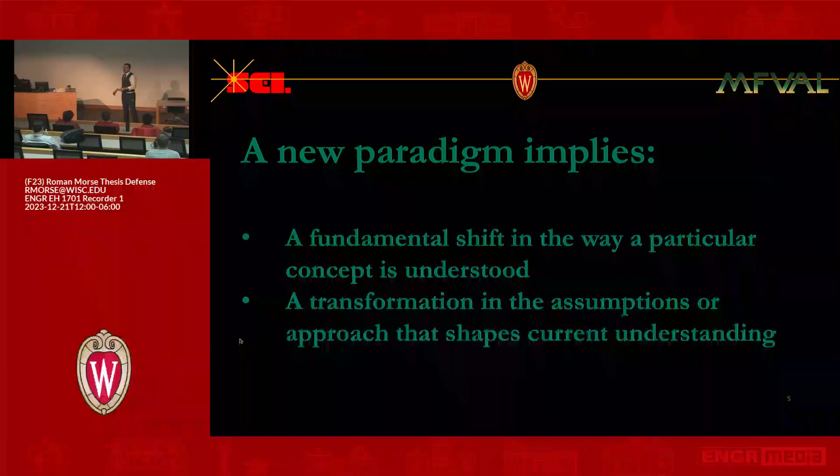So what is a new paradigm? Well, a new paradigm implies a shift in how we think about something conceptually. New information is brought to light, and it changes basically how we view some sort of concept or how we approach something. So, bold claim. Well, you should be asking, what's a current paradigm? What's wrong with it? And what information do I have to show that there is a new paradigm, that we should change a paradigm? So that's what we're going to talk about today.

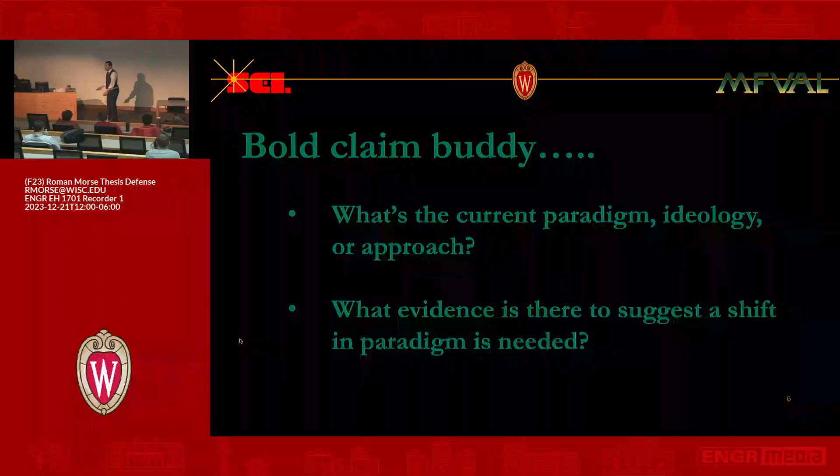All right, so the introduction is just a little bit of description of our work, and then some basic nomenclature, some definitions, and then we'll get into the fun stuff.

But you do reach a certain point where there's this boiling crisis, as it's called. This is associated with a severe reduction in heat transfer coefficient. This is very bad for something you want to keep cool.

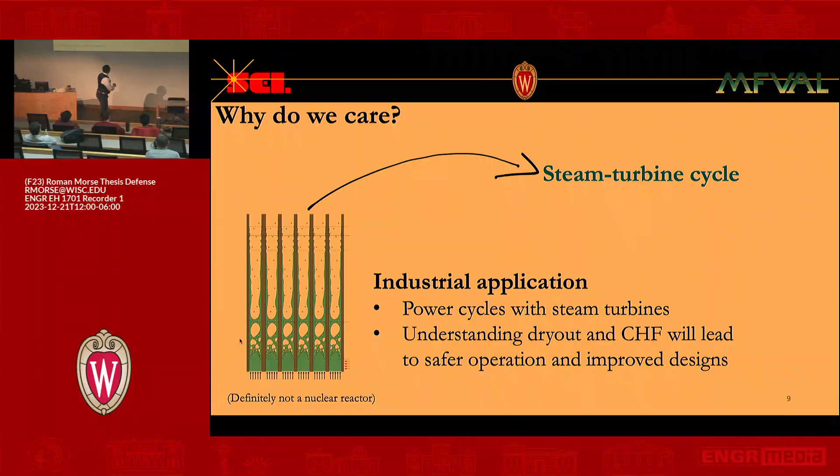And what this looks like — well actually, why do we care? Well, if I take that and I turn it around, flip it on its side, stack a couple of them together, basically this is what a boiler looks like. This is a nuclear reactor, essentially. You have water coming in, steam coming out, goes to a steam turbine cycle.

It's actually a transition of regimes. There's a lot of cool stuff in that poof. So we're going to talk about that poof all day today.

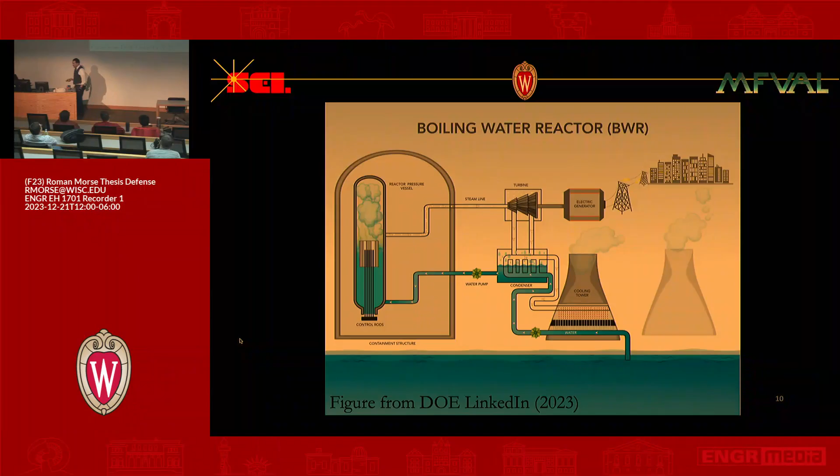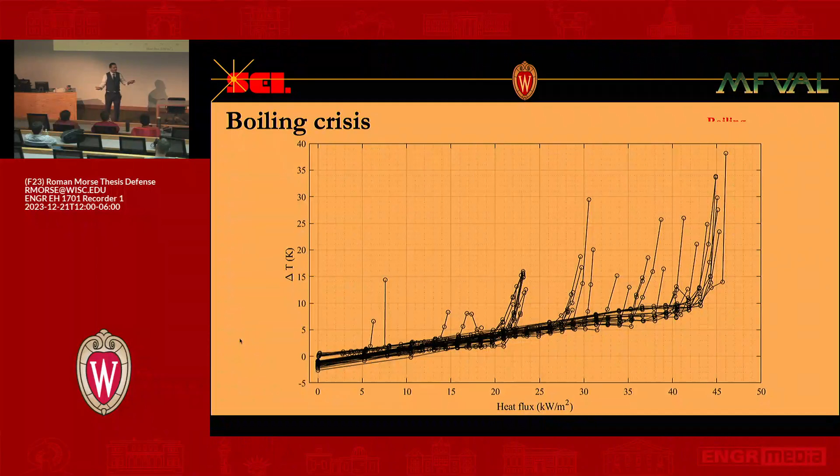We're going to call them... so the nomenclature is also inconsistent in the literature. I'm going to use critical boiling transition and CHF as equivalent names because everybody seems to. But at some point, us nerds should get together and figure out what to call these things.

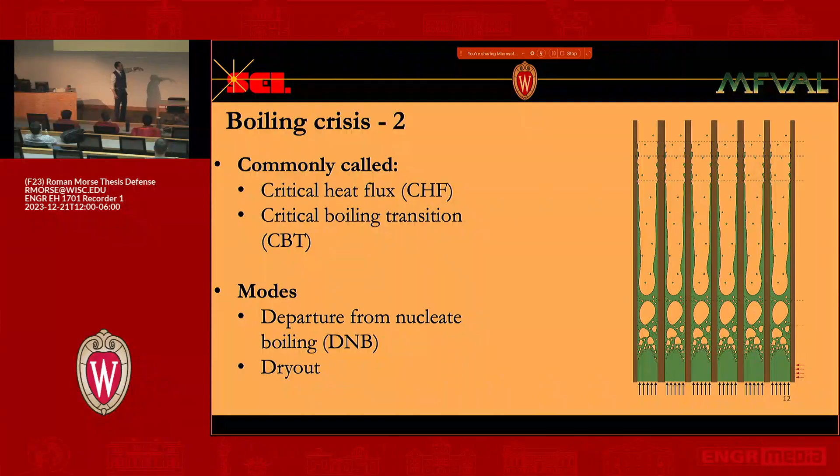All right, so you guys missed the most important stuff, so might as well check out now. But basically, there's two types of boiling crisis, or critical heat flux, or critical boiling transition. There's two ways that this can really happen. One is at the top of the reactor or the boiler, and one is at the bottom. So the one we're concerned with is this dryout, and that happens up here at the top. There's also what's called departure from nucleate boiling, and that happens at the bottom of the reactor. So dryout happens where you have evaporative film boiling, and departure from nucleate boiling, or DNB, happens when you have nucleate boiling as the dominant mode of phase change. But again, we're going to focus today on dryout.

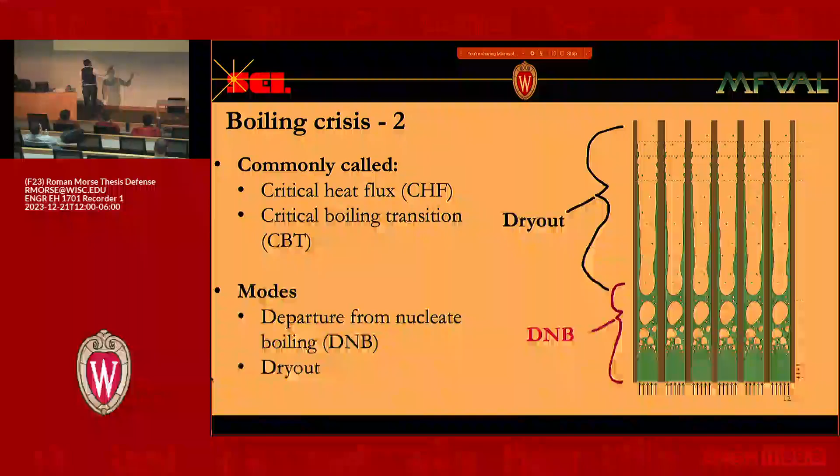And the reason this is important is because most of these flow channels are actually annular flow. This is from Jean-Marie Lacour, he was a Westinghouse engineer, and he runs these simulations with this wicked cool proprietary software for boiling water reactors. This is a simulation for a boiling water reactor that he ran for this year's NURETH paper. As you can see, if the entire flow channel length is 3.5 meters, annular flow starts at 0.6 meters. That means like 85% of the channel is in annular flow. So that's why dryout, and understanding dryout, what causes dryout, basically how to control it if you can, that's why this is very important.

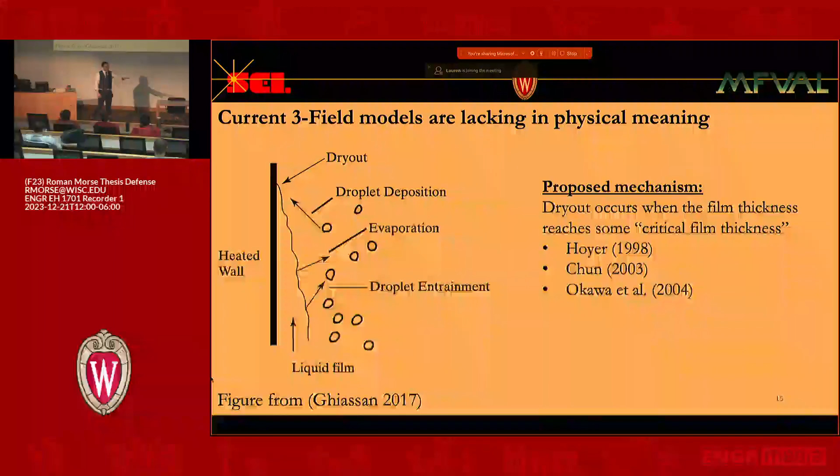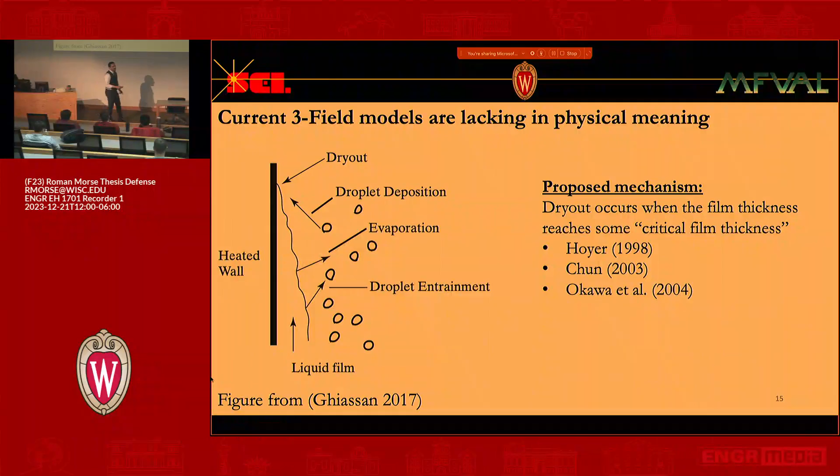All right, so what is the current paradigm? Well, the current paradigm and the current proposed mechanism is a critical film thickness. Basically, the film gets to a certain height, and it just poofs. This is analogous to my poof earlier. So in the way this is modeled currently, it's a three-field model. Basically, I have the film here just smoothly transitioning to zero. And then there's these critical film thickness correlations, and these are needed in order to make calculations for reactor codes.

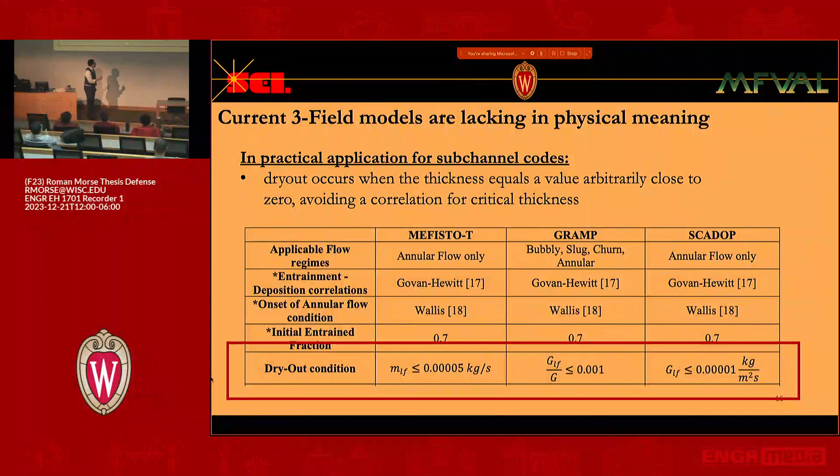There's another way to do it, which is maybe just as arbitrary. Basically, so these here, MEFISTO-T, GRAMP, and SCADOP, are reactor codes, basically thermohydraulic codes. MEFISTO-T is the Westinghouse proprietary one. I think GRAMP was built by Imperial College, and SCADOP is an Indian company, maybe. But this is the criteria they have set for dryout, just that the mass flow rate is some arbitrarily low value. This doesn't tell you anything about physics. This doesn't actually help your prediction. You're just saying, okay, it's so small that I probably don't have film there. Hopefully that works, but you're not really telling me anything about what's going on here. So this does work, and you can iterate through this and make sure you reach an appropriate level. But because we don't know the mechanism and we don't know why this is actually happening, we always have to kind of stay back from our optimal operating conditions.

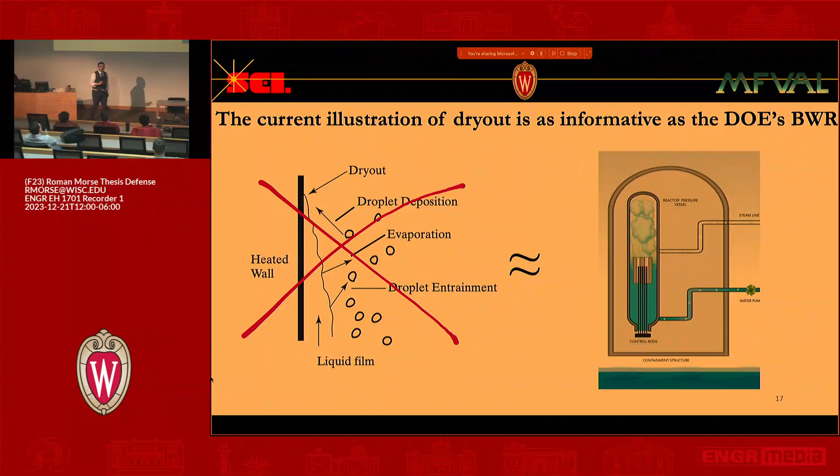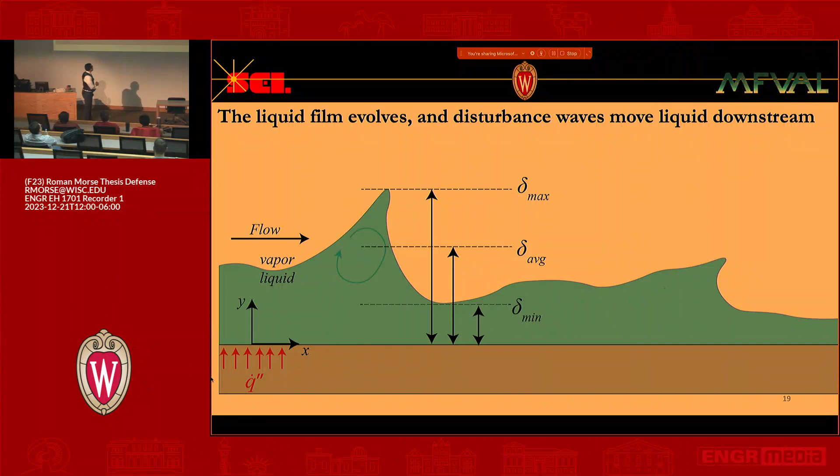We can never really push it because we don't want to have a nuclear accident. All right, so I want you to think of this poof and this poof as being analogous. And we're not going to think about it this way anymore. We're going to talk about the film as a different construct rather than just a continuous liquid film. So really what happens is you have a film that's comprised of basically a base layer and a wave layer. And as you propagate downstream, you end up with this intermittent dryout. It doesn't just go poof. You have wet, dry cycles. And so understanding how those work, understanding how long it can be dry, how long you need to be wet before heat transfer is completely degraded, is really important. So that's what we're going to talk about.

So first we're going to go through a timeline of our work. Then I'll talk through the facility, and we'll look at some measurements. All right, so the MFVAL timeline.

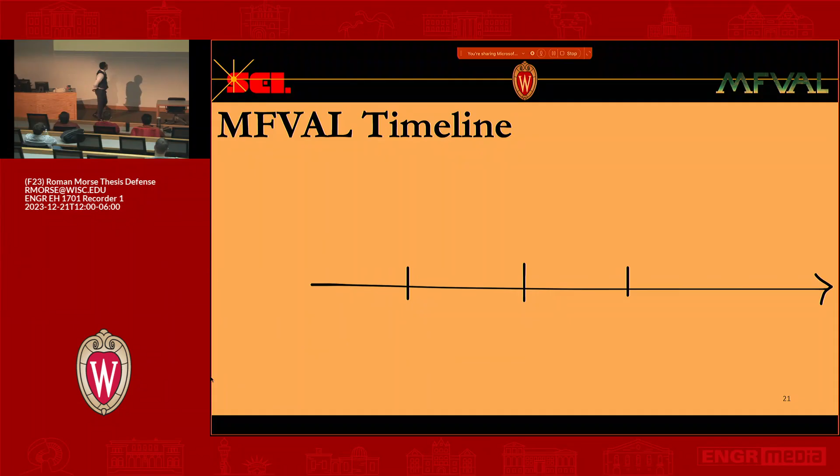So when I arrived in 2017, we had just taken over for a professor that had left. That professor, Tim Shedd, was an established professor in the two-phase field. He had already published significant papers about droplet entrainment, velocity distributions in the liquid film, and had made the lab an established place that performs good science. But when we got there, it was bare bones.

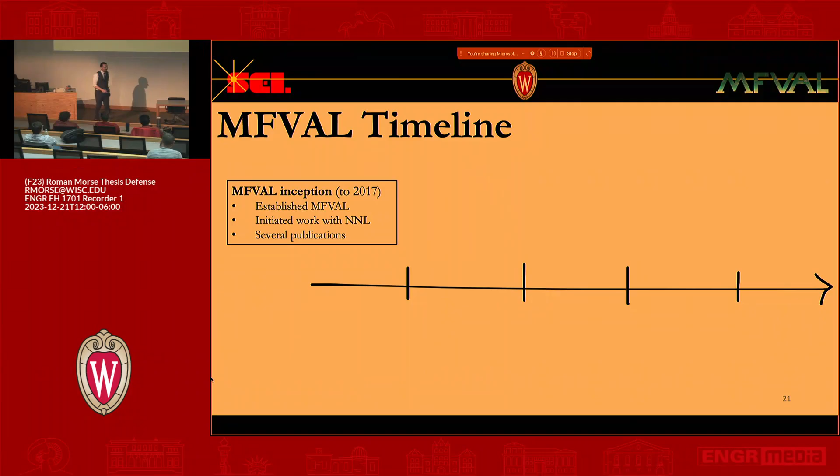So we get there, and the way I get my foot in the door is Dressler, as we're leaving MATC one day, we're sitting at a table, and he's like, man, I need a plumber in my lab. I was like, my dad plumbs, my dad's a plumber. Having no real plumbing experience myself, but I was like, dude, yeah, totally, my dad's a plumber, I could do it. And so he's like, all right, fine.

So he brings me in, and then we get another graduate student, Brian Fehring. He comes in, and basically he took a lot of time to make sure that the structure was good. He also implemented these optical techniques and made sure that they were measuring what we needed to measure. He spent a lot of time in CAD, thankfully, because I hate CAD, but did a lot of stuff to improve the integrity of the facility.

Then we had a visiting scientist, Tiago, come from Brazil, and he was just described to me as some kid from Brazil coming out. And so he gets there, and it turns out he's like a wizard, and he knows two-phase flow. This was the biggest thing.

At this point, we were still just a bunch of guys that kind of knew what we were doing. We didn't know if we were measuring stuff right, or if we were running the right sort of conditions. What Tiago really brought to the team was validation. He had been through this before, had worked in a lab that had done these experiments, had published good work, and knew how to perform these experiments. This was a really big step.

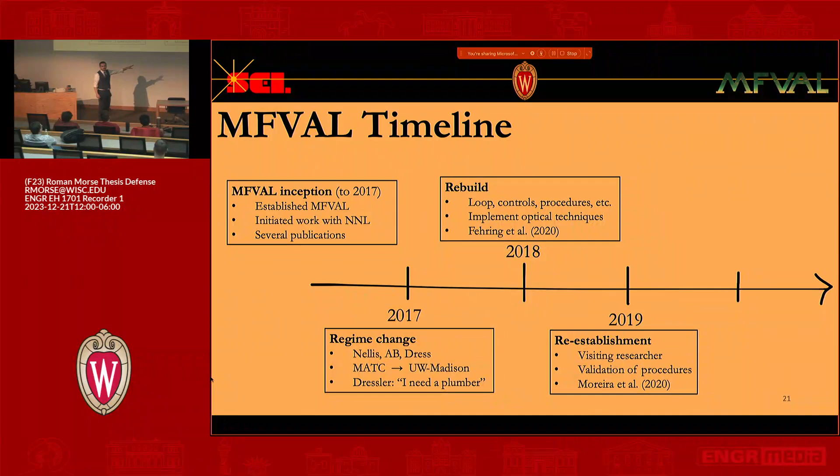This is us stepping into the big leagues. This ended with Tiago publishing a paper that measured wave velocity in annular flow. After that, we kind of took off. We had a big paper in 2021, and then I've had a couple papers since then. Jason's also got one in the works, so we've got 3 or 4 publications coming out. It'll all be 2024 - it says 2023, but these will all be 2024, except for the Nerith one.

But basically, yeah, now the lab is established. We're doing good science, we're known for doing good science. And so let's talk about science.

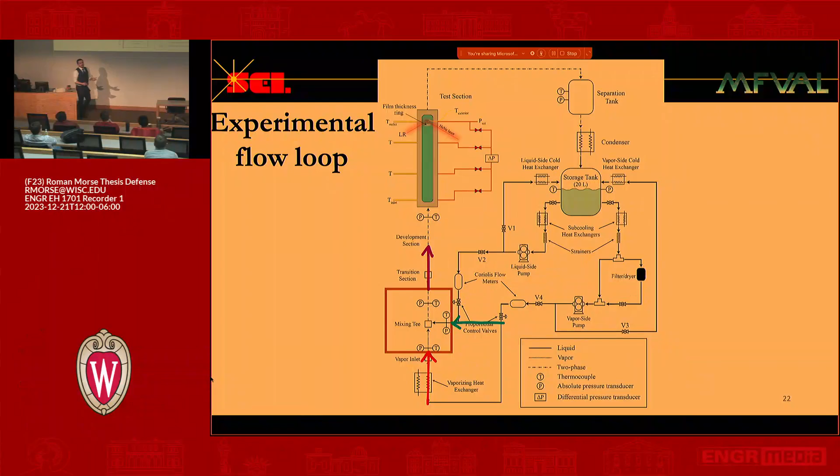So this is a schematic of our flow facility. We're going to start from this storage tank here. There are 2 separate circuits: one has liquid that gets injected into the loop as liquid, and the other has liquid that eventually gets vaporized and injected into the loop as vapor. They mix, and we get a known vapor quality. Starting at this mixing tee, I mix superheated vapor with subcooled liquid and get an outlet mixture with known vapor quality. This then enters the test section here.

Our test section itself is 2 big glass slab walls. This was designed by Chris Rushmore, this guy right here - phenomenal job, still in use today. 2 big glass slabs, and on the inside of the glass slab there's a tin oxide coating. We apply a current through that, and that allows us to heat.

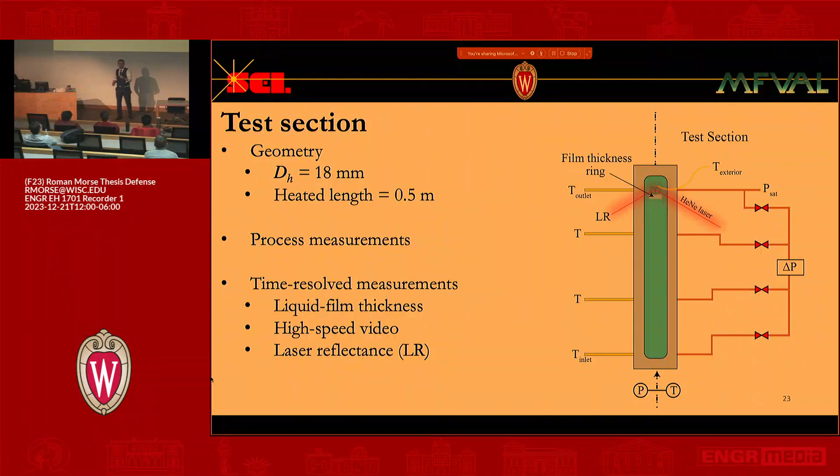Along the test section itself, it's fitted with pressure measurements, differential pressure measurements, and temperature measurements - these are all process condition measurements. We also have non-invasive measurement techniques that we use. This helium neon laser and this film thickness ring are used to measure things external to the test section, so we're not probing the film or disrupting the flow, we're measuring it from outside the test section.

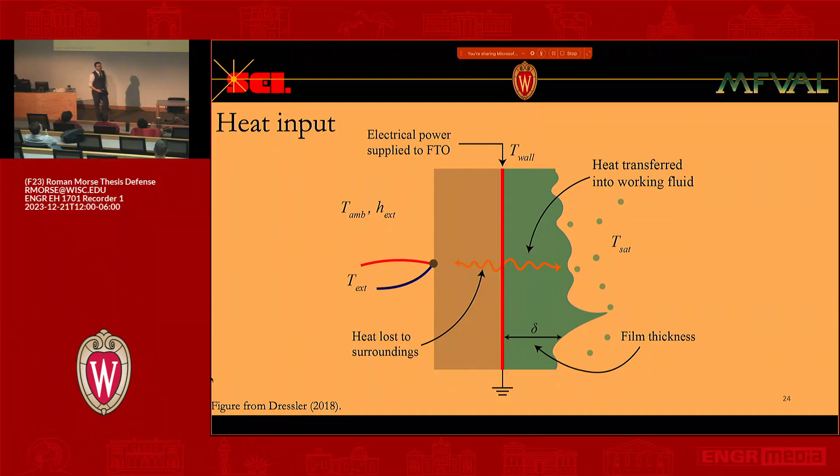So how does heat get input in the system? We talked about this a little bit. Basically, there's a tin oxide coating, and we apply a current to it. Some of the heat goes into the working fluid, some of the heat escapes to the surroundings. We account for this using a thermal resistance network and an energy balance. We can go through that more later if you guys are interested.

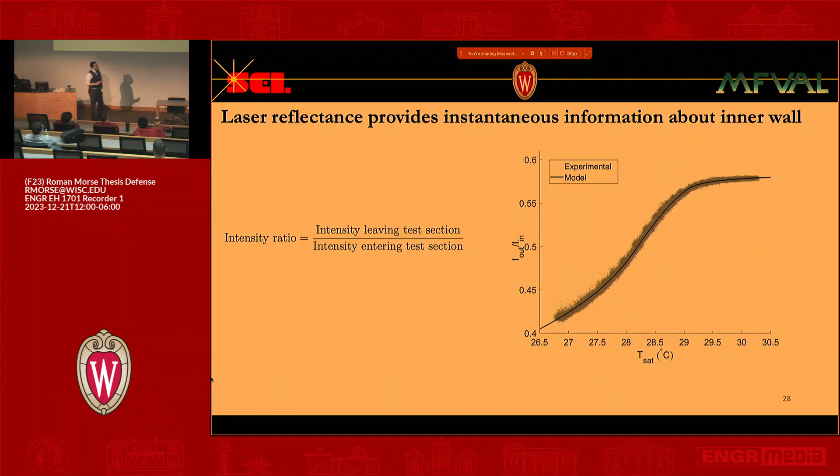That's awesome, we can measure the inner wall temperature without having to stick a probe in there. Super cool. Well, I'm kind of a simple guy, so I figured we could also use this as just like a binary signal. Basically, if I have liquid at the wall or I have vapor at the wall, that signal changes dramatically.

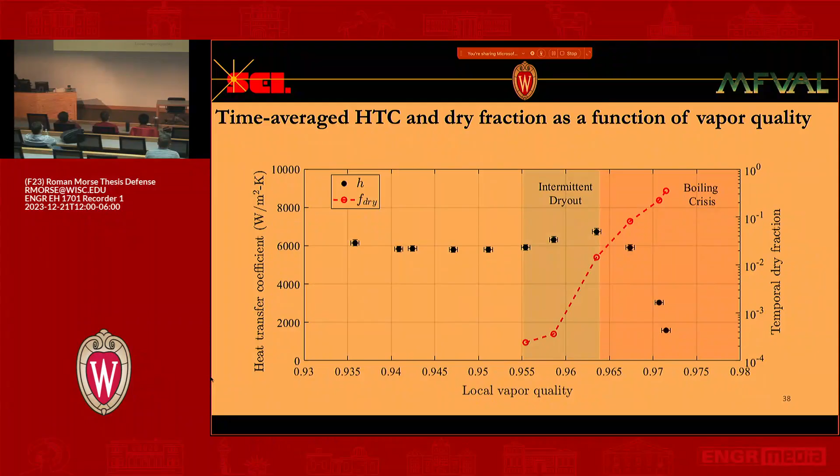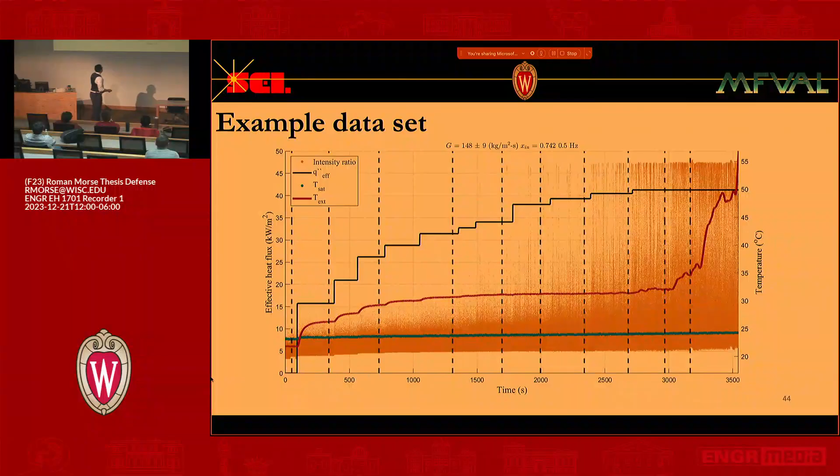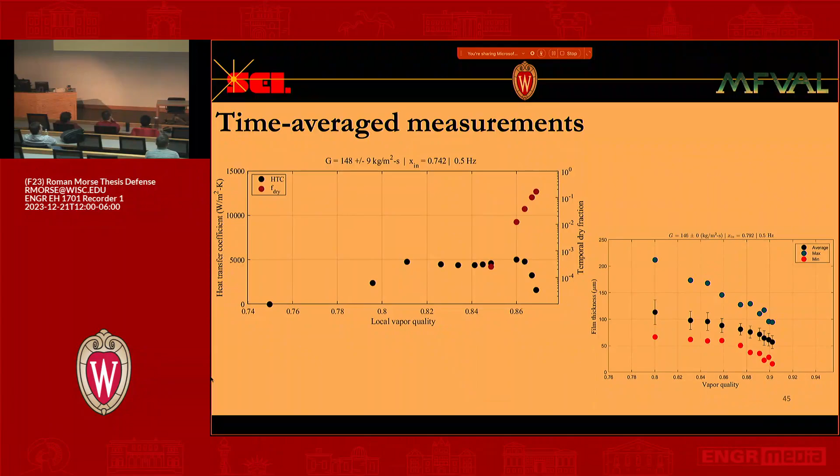And so I can really see from all these measurements the evolution of the film as we heat. These are, again, time averaged. So this is the same thing: heat transfer coefficient and F-dry as a function of vapor quality, the same behavior we saw for the steady state. Over here, I have time averaged data related to liquid film thickness - the mean, the wave height, and basically the minimum.

What was interesting, though, is we saw that for every inlet condition, for large amplitude, low frequency pulses - 1 hertz, half hertz, something like that - we saw a big dip in our CHF, the heat flux that made us go to runaway temperatures. But once we had high enough frequency pulses, it went back to being pretty much equal to steady state. So these big pulses have some sort of effect on the flow, and we're not quite sure what that is at this point.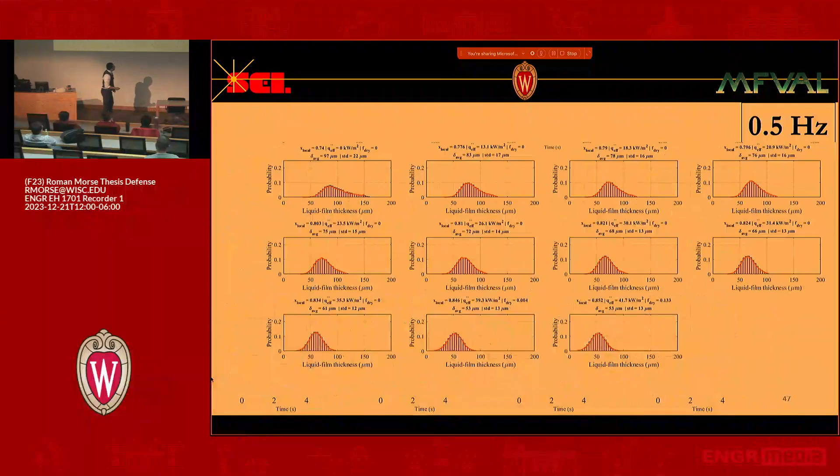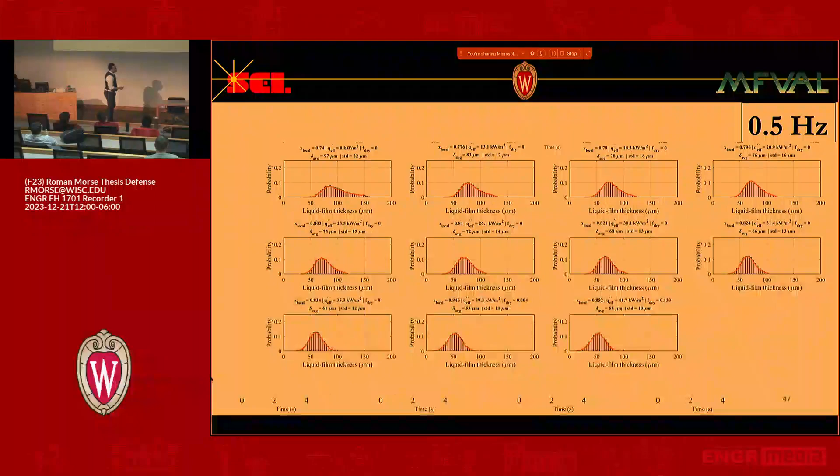Another cool thing we can do - I'm not going to talk about this much - is we can take PDFs of the liquid film thickness measurement, and there's a change that happens. This is unheated, increasing heating power, all the way to the point of dryout. You'll notice here that I have a log normal - for you guys that aren't math nerds, that just means instead of a normal bell curve, I have a bell curve with a tail. And then it transitions to more and more normal - more of a normal wave function rather than a big wave, and then just like this.

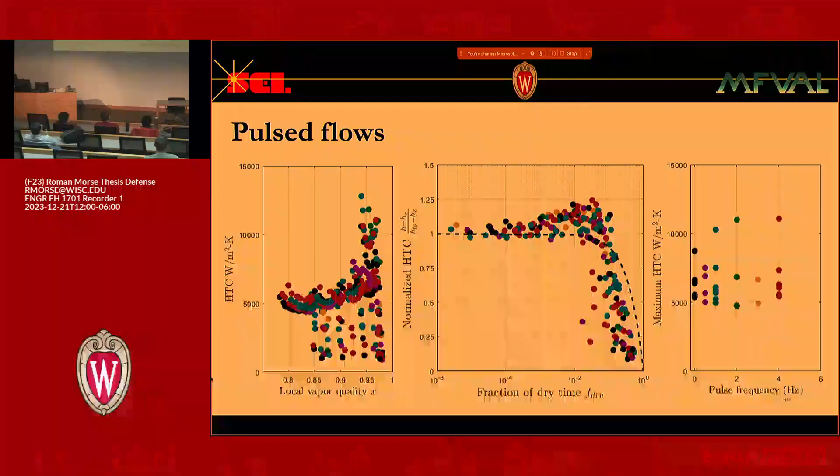All right, so we take a look at the heat transfer coefficient normalized. This is actually the nominal value of heat transfer coefficient for all the pulse data, and here's the normalized values. I have them plotted as a function of pulse frequency. But this one is what we're going to look at - we're going to compare it with our steady state data.

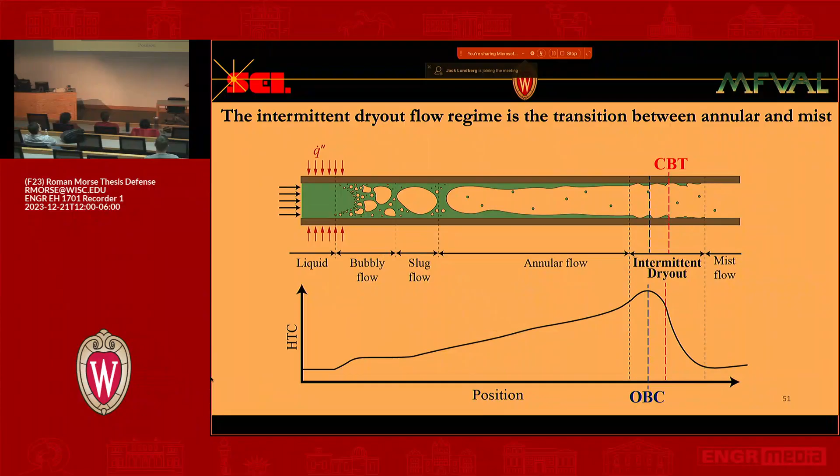Well, it agrees. So for some reason, 5% of the time, I reach this critical heat flux, or this optimal boiling condition, this peak heat transfer coefficient, at 5% of the time no matter what condition I have. There's another comparison - we're calling that OBC. If you really want to get into nomenclature, read my papers. I'm not going to get into that too much, it's very boring.

So what the hell is going on? Well, let's take a look. Oh, did you not play? Come on, guy. There she goes.

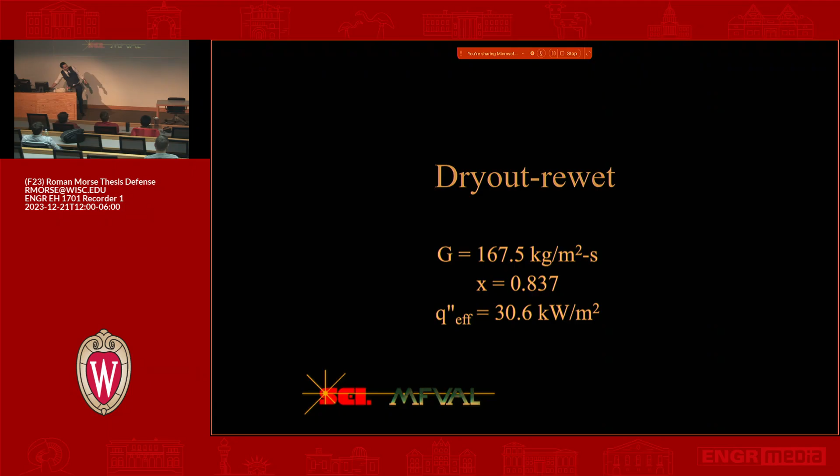All right, so this actually captures a sequence of dryout and re-wet. We have the flow going upwards in the channel right now, and this is all liquid. We're looking again through the heated surface, through a glass window. There's a bunch of surface features present, these ripples, and as we get thinner and thinner, we're heating, they start to diminish.

So much so that at this point here, there's almost none, and that's where we get our first dry patch. The film completely evaporates down to the point where it's so small that I can't have any sort of oscillations on the surface, and it dries out. The dry region grows, it coalesces with another dry region, and now almost my entire test section is dry.

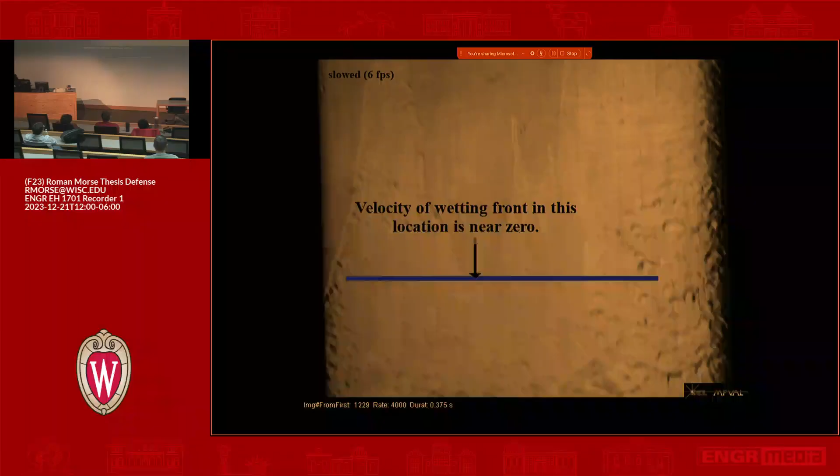So in order to re-wet, I need some sort of liquid to come through. Well, it does that in the form of a wave. This blue line here represents just a wetting front. The wetting front moves upwards, but it's slowly decelerating, and at this point here, it's pretty much stalled. I also change the frame rate because this happens very quickly.

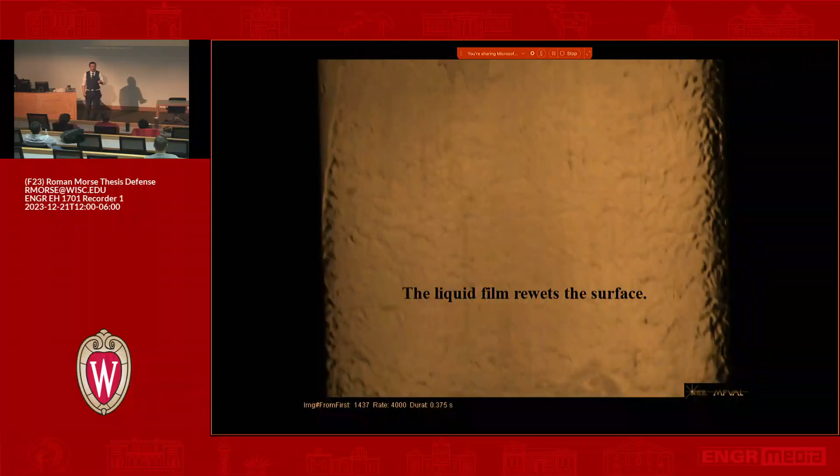Here's a big disturbance wave. This comes and catches this wetting front, and it has enough momentum to force the liquid over the wetting front and re-wet the heated surface. This is the actual mechanism for dryout, this is how dryout happens. There's no critical heat flux, there's no critical film thickness - it's the wave re-wets, and the base film in the wake of the wave dries out.

That's as simple as it needs to be. You don't need any sort of correlation, you don't need to estimate some critical film thickness. It's really dominated by the disturbance waves. So with that idea, can we describe that mathematically? Well, if I take T-wave as just the wave period, 1 over the frequency, and relate that to the F-dry we talked about earlier, I get this expression here.

So then I'm going to take this, plug this into here, and solve that for vaporization time. So if I did this energy balance on just a chunk of liquid, I would calculate how much time it would take for the liquid to vaporize with some corresponding heat flux. And I get this expression right here. I rearrange that a little bit, put F dry in there, and this is the final expression.

So I have heat flux is equal to the density of the fluid, the enthalpy of vaporization, times the wave frequency, the base film thickness, and then how much ever dry you want. This just relates to the extent of the dryout. So is it 5%, 1%, 10%? This is just related to how much dryout there is.

For these measurements, like I said, we noticed a peak heat transfer coefficient at 5%. So that's what I compared it with. I put in F dry is equal to 5, and compared it with my experimental data here. As you can see, there's pretty good agreement. I couldn't force a correlation to look this good. And so this agreement confirms the postulated mechanism.

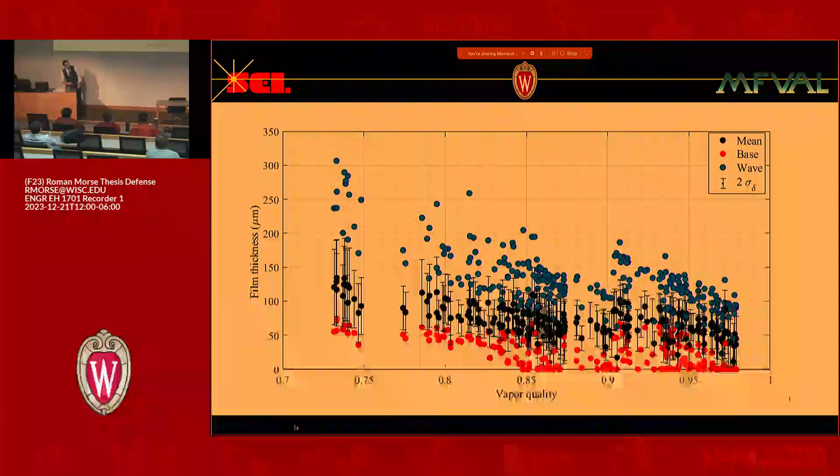No, that's okay, this is actually future work. So you gave me a perfect segue there. So this is every single data set I've ever taken. And I have this plotted as a function of film thickness and vapor quality. And this looks like a friggin' mess. But if I take it and normalize it using wall shear, I get this. I get the base film thickness is certainly on the order of the viscous sublayer. And basically, it provides just that lubricating layer so that the waves can continue to be turbulent and propagate downstream. And so it just serves as a lubrication layer. So I think that the observations you guys made are identical to pretty much what we're seeing here now too.

Cool, awesome, thank you. Yeah. Great job, thank you, very cool to see this.

Oh, total internal reflection. Yeah, all right, we'll go back. Should have just taken Jason's for this.

All right, total internal reflection. Of course the nerd would ask a question about this. All right, so what happens is... these are all Thiago's figures, by the way.

A laser beam gets directed towards the test section, normal to the test section. It hits a piece of diffusing tape, and when it hits the diffusing tape, it spreads in all directions. Then it gets to the inner layer of the wall, where there's either vapor or liquid refrigerant, depending on the state, but also depending on the height, it reflects back. So the higher the height of the liquid film, the more it reflects back in this general direction, so I have a bigger light ring. So if I would have a thicker film, this light ring would increase in size, versus if I have a thin film or no film...

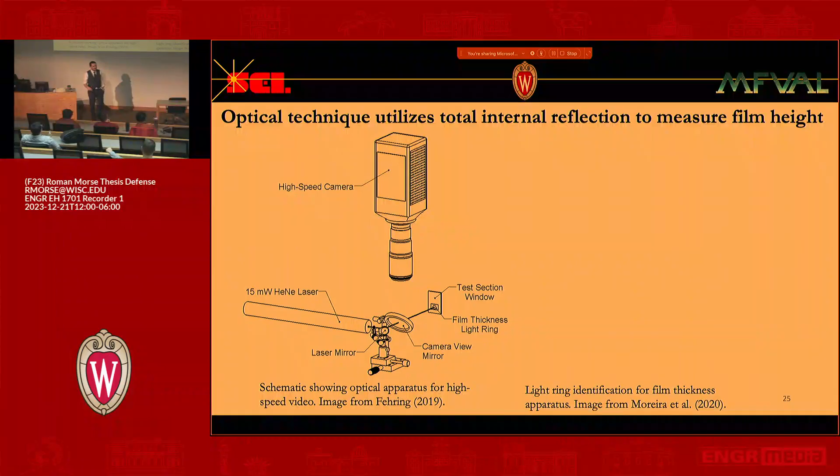Why was I interested in this? Well, that's funny actually, this is twofold. One, because I worked in the lab and I just wanted to get in the lab. I just wanted to do research, and then I started to think it was cool and cool and cool. And two, the reason that this got so deep...

Let me see if I can go back to my nice, handsome plots here. The reason this got so deep is because of the vagueness that we were asked to write a report from the Naval Nuclear Lab. The task was write a report on CHF. At that point, if you read my first paper, there's 10 different definitions for CHF, so I had to go through and find out what I thought CHF was. And so the vagueness at which we were given the task, and also our sponsors' willingness to just let us science and let us look at what's interesting, not really force us any which way. Just tell us, hey, if you find something interesting, follow that path.

We worked with a really cool guy, Evan, at the NNL, and that's what really led to this. I started to see this behavior, and it was weird, and I like weird, so I just kept digging and digging and digging.

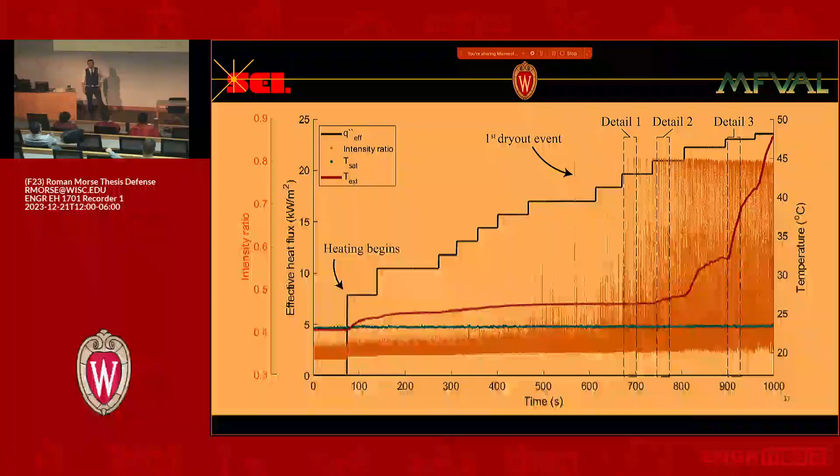Yeah, a lot of work went into your whole project. Is there anything in particular you're most proud of? That I'm most proud of? Why you gotta do that? Yeah, I should have thought about this actually. That I'm most proud of? Yeah, here you go.

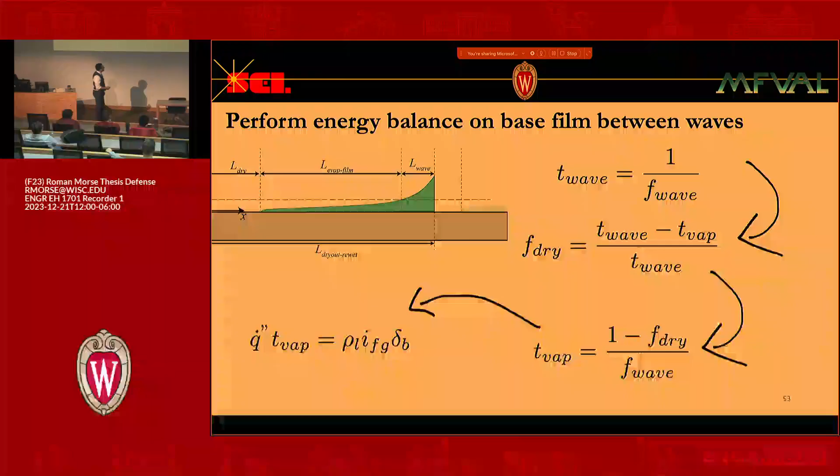So this, first of all, this is pretty cool. But what am I most proud of? This, working with these guys. Getting the opportunity to work with these guys, these guys, these guys. Literally having the opportunity to work with so many brilliant minds, and so many different thought processes and strategies, and learning from, I mean, Jason's a technical wizard and can do things I could never do. Learning from him and growing from all these guys in many different ways is really, I think, your name should be up there.

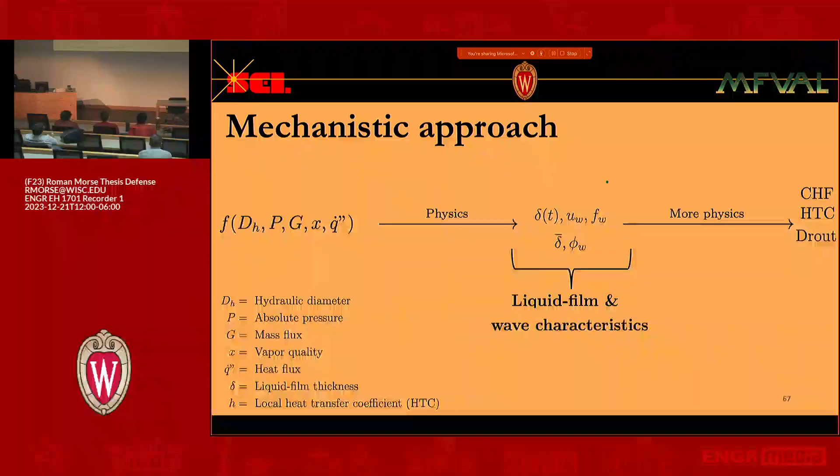In real life, this is typically done by giving a set of inlet conditions and flow parameters, then force-fitting correlations to some big database, and it spits out an answer, right or wrong. But really there's physics, and physics lead to liquid film characteristics, and these liquid film characteristics have more physics involved, leading to CHF, dryout, and heat transfer coefficient.

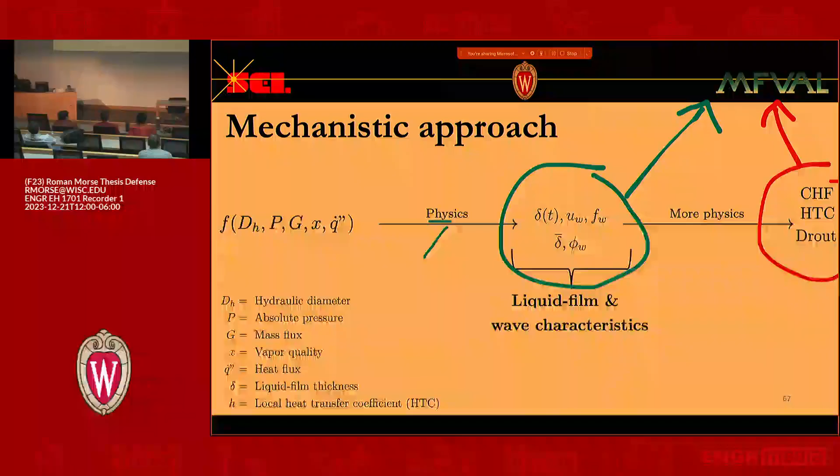So a big part of our work, specifically Jason has been focused on that part of the physics, and Roman has been focused on this part of the physics.

The maximum that you see is much higher than 25%, right? Yes, yes, absolutely.

My second question is, just speculating, can you tie that into Jason's obstruction wake region for the boundary condition? Does that explain the fact that you could generate these very high heat transfer coefficients in the wake, and maybe take advantage of that?

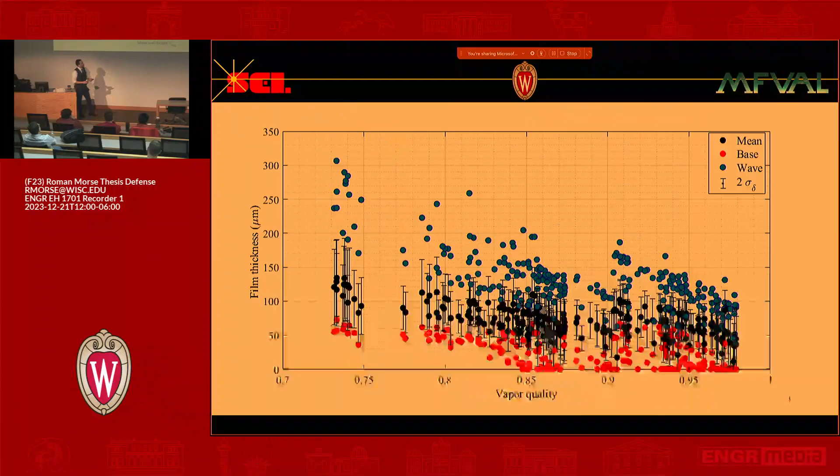Yes, sir, Jean-Marie. In your video, if we go back to this video, what is the F dry for that video? The F dry of this, of the waves passing over a dry patch? Oh yeah, the dry out re-wet video. Yeah, that.

2.5%, I'd have to actually look, but it's less than 5%. How does this video look if it's over 5%?

That video only captures a single dry out re-wet sequence. What you didn't see was the rest of the video where it was wet. I'm imagining that if you are above 5% and you have more time in the dry region, is that enough to explain temperature runaway? I was imagining that actually your dry patch at some point will never re-wet. You might have some waves, but they will not re-wet the dry patch. They will go around it if possible, or go on top of it.

Basically, that would be like a Leidenfrost effect. Yeah, like a Leidenfrost effect.

You're absolutely right. The time scale at which the waves arrive, especially in this region, is where you reach the peak heat transfer coefficient. If you increase heat flux and start to reduce your heat transfer coefficient, that's exactly what happens - you get some regions that don't re-wet. And every time now there's a bigger time lag between dry and wet, and that allows that region of the wall to become more superheated, which means when the wave arrives, it touches a higher temperature surface, causing more vaporization at that instant.

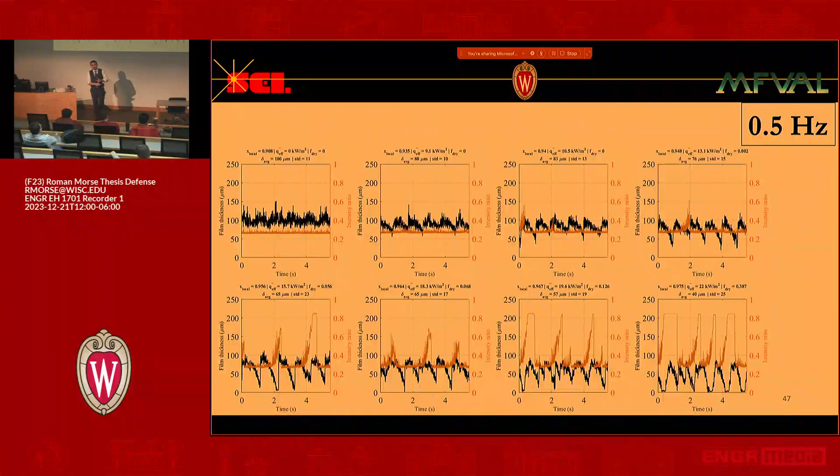So I think it would have to be modeled as a Kelvin-Helmholtz instability to begin with if you were going to model the actual physical evolution. But if you were going to model just the waves themselves at that point, you could start with just stacked wave functions. So how would I implement this? It works for this test, but can I extrapolate that to interaction?

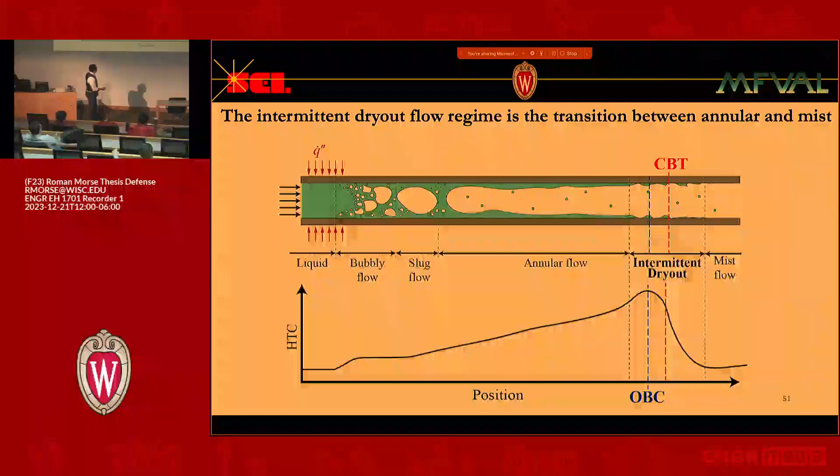Yeah, absolutely. In the MEFISTO-T right now, they have a correlation for wave function or wave frequency. That's for water, steam water, and for delta B. What is delta B again? Delta is the film thickness - delta B is the base film thickness.

Which we established, by the way - once the wave passes by, it has to. That goes back to the idea that Tim brought up, that in order for those waves to remain turbulent, they have to reestablish that base film underneath it. But the delta B and the frequency are liquid and surface dependent - fluid dependent and likely surface dependent. Although I see a lot of research showing that as long as it's not extremely rough or a bizarre surface, a lot of these fluid characteristics are independent of roughness.

Right, but what's the slide you were having with your simple equation? What were you predicting? So if F is 0.05, I can get rid of the parentheses and it's approximately the same as the data. So that's one thing I don't know - we haven't tested this enough. I got 1 minus 0.05 is 0.95, so what's in parentheses is just a correction factor.

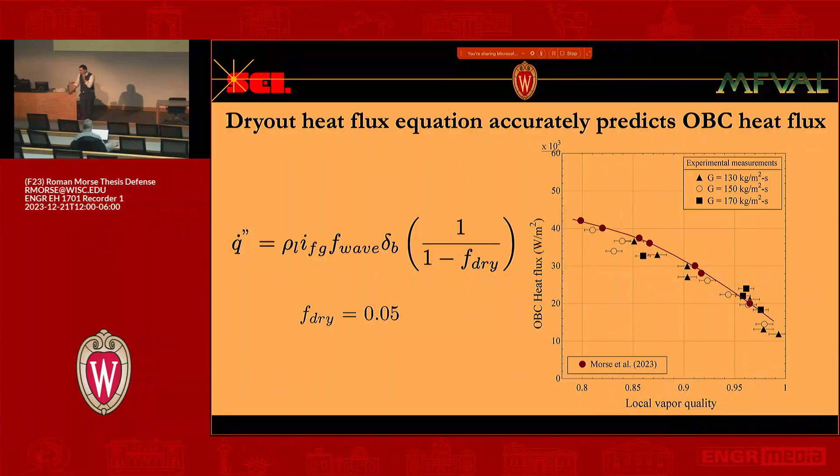This is not, up. But what I understood to be the case is that you need to measure the wave frequency, the inverse of that, the reciprocal of that, and the base thickness. Yeah, and you can estimate, but the thing is you need to measure wave frequency. You can estimate the base film thickness. This is future work.

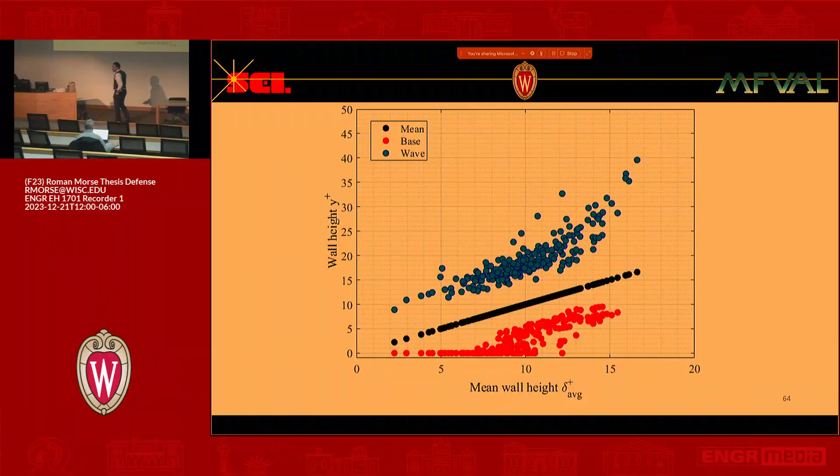Using y plus equal to 5. So typically, if I go even farther, I'll go to an actual data set and show - so for a single data set, this is one case. I took this data set here and normalized everything, and this is what I got for my minimum base film thickness. So it's almost consistently y plus equal to 5. So I think it's just Jean-Marie and, well, I guess Cruz.

Can you hear me, Roman? Yeah. Can Jean-Marie stay, or does he have to leave too? I'm still here, can you hear me? Yeah, can you hear me? Yeah. No, because you listed me on the committee, so I'm not sure if I was supposed to join somehow, is it okay if okay? So everybody who's not Jean-Marie or Evan, could you guys leave? And thanks for coming, love you lots.

All right man, congrats bro. Good stuff, thank you. Let's keep in touch, man. Yeah.

So your hypothesis is that y plus equal to 5 is a way to estimate what the base film is? Based on measurements. Right, but I'm still back to what Professor Anderson asked about in terms of fluid and surface combination. Yeah, so you'd have to check that for different fluids and different surface combinations. Correct. Yeah, so the correlation in Jean-Marie's 2022 paper that he uses for base film thickness is slightly different than what I use.

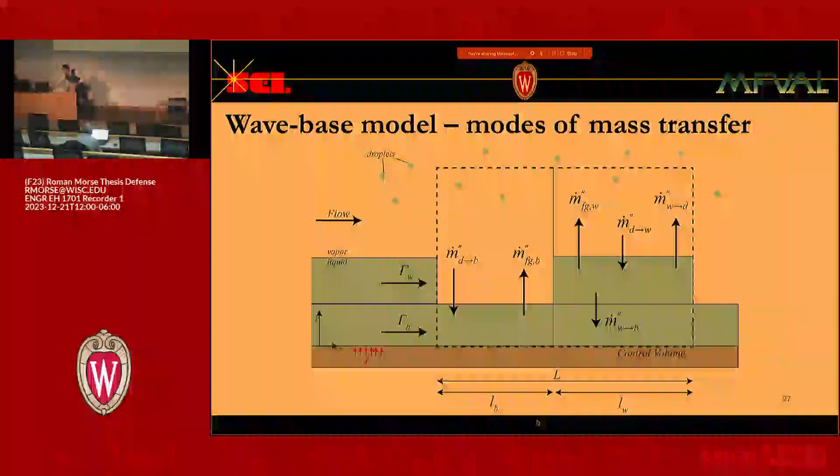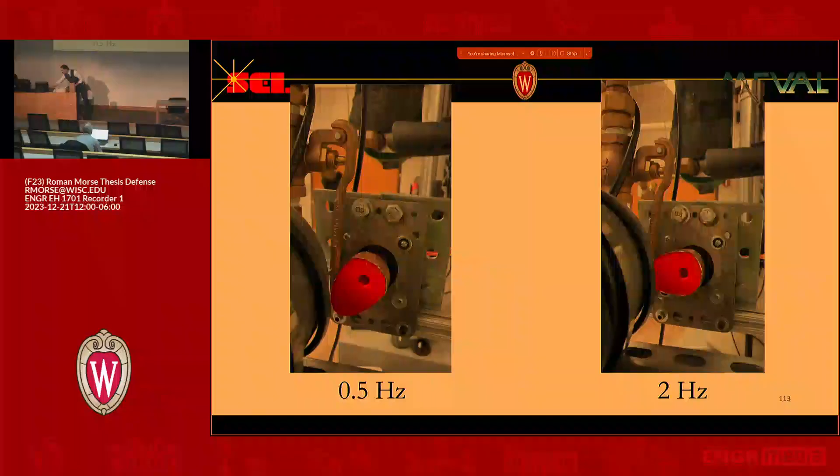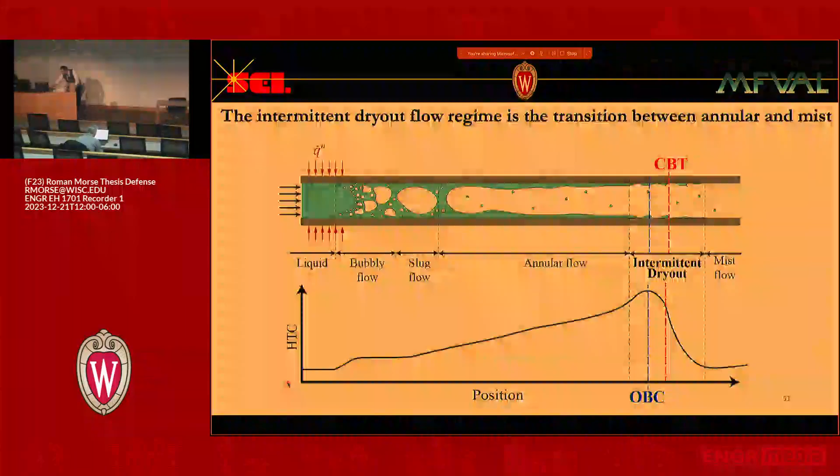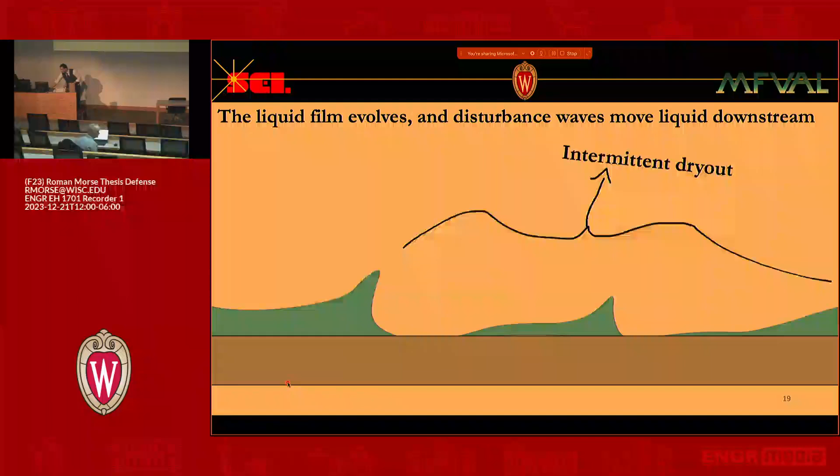Here we go, back to here. All the way back to the beginning. So here, one more time. There we go, okay.

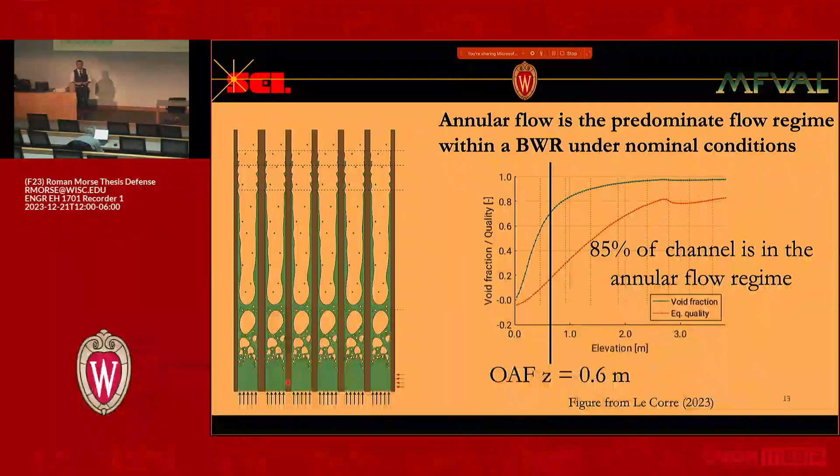So the wave frequencies are definitely a little bit higher, but you'd expect that, right? You'd have higher mass flux, higher shear at that interface. I'd expect higher density vapor to have a bigger effect on the liquid to drive more of these waves. So you do get higher wave frequencies, but it's on the order of tens. I understand how the Y plus equals 5 will help you scale. I don't know how you're predicting the wave frequency.

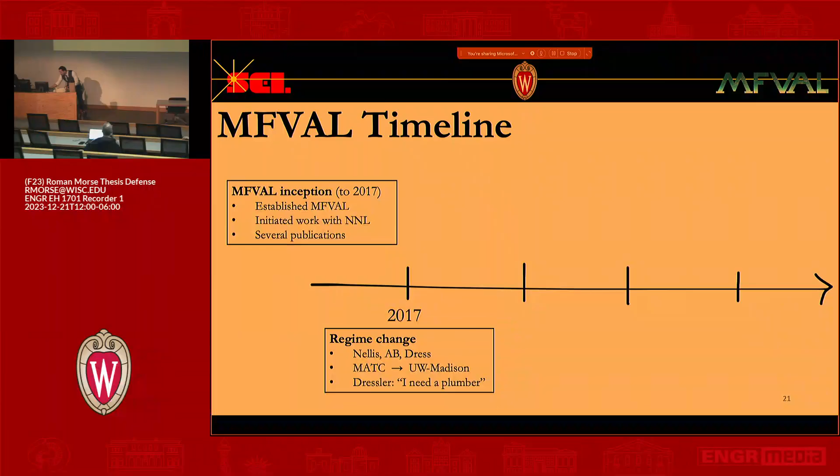I'm not predicting the wave frequency besides using a correlation, but what you can do, now that we can - I'm just going to scroll to it. Now that we can, you just hit a number, I can go to this one. Oh, does that work like that? I don't even know. Oh, sure does. Yeah, tricks of the trade.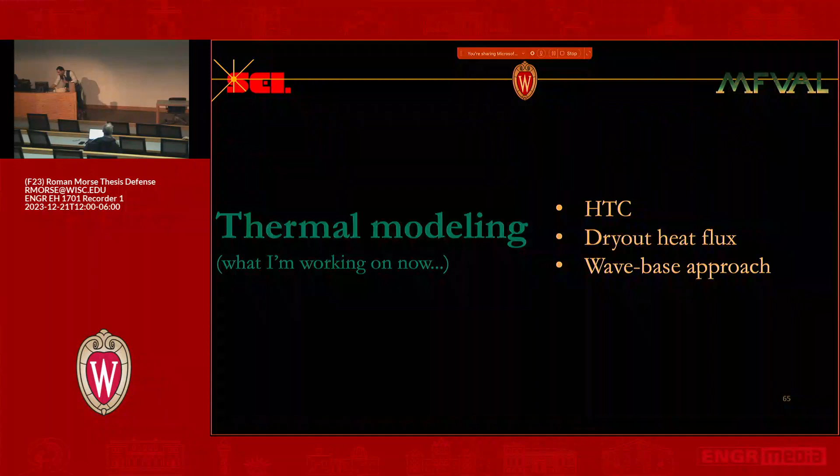So the wave frequency question. All right, so basically if we were to go through the 4-field modeling - this is the modeling that Jean-Marie proposed. Rather than a 3-field with drops, vapor, film, we break the film now into 2 components, waves and base, right? So you go through the equations, here are the definitions.

Basically you can work it to this point here. So this is just conservation of mass simplified as much as possible. And the wave frequency is built into basically this term here. So UW, the wave velocity, is really the wavelength times the wave frequency. So I know everything here.

Well, now I do - this is droplet deposition, this is how much is vaporized, and this is a transport term that I recently modeled. If I'm able to solve everything here, and these are just models - the droplet deposition and entrainment model either come from Govan and Hewitt, or Ishii is the other one. Pick which one you like and stick it in. This is just the amount that's vaporized from each field, and then there's a net transport between the 2 fields. So if I know everything here, which I do, I can then solve for this term here.

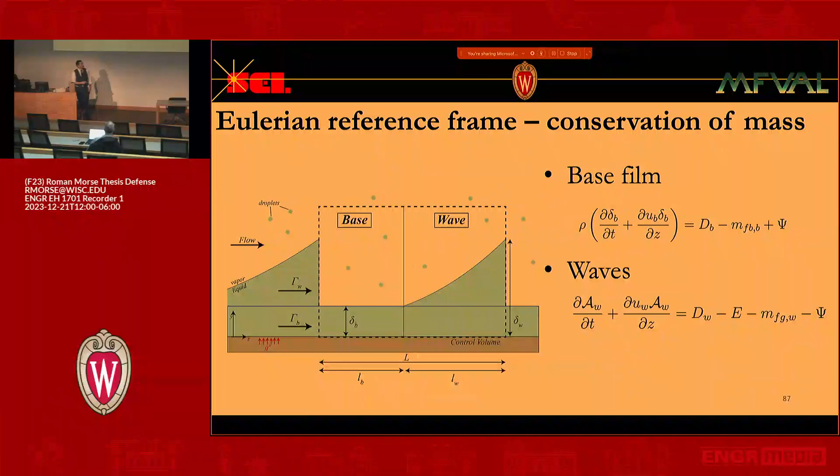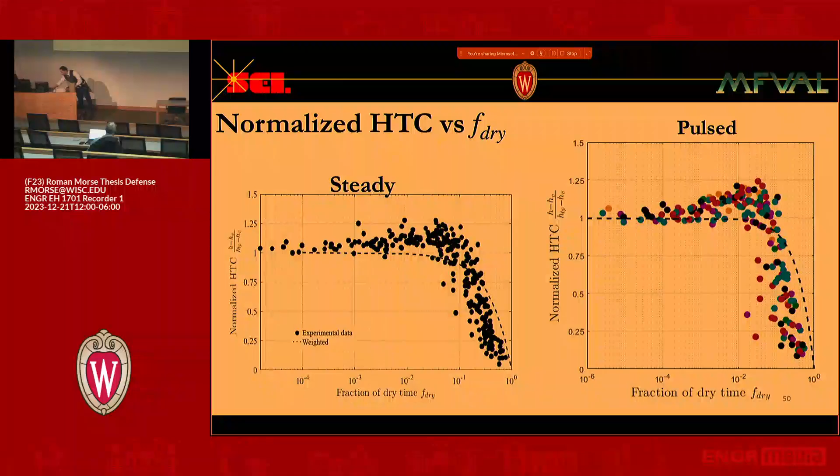So you're saying the wave frequency is an output of the model? It will be, yep, but right now there's a correlated input here. Right now I have a correlation - is that what you're really asking, how did I get the wave frequency for that figure? Yeah. Oh, I literally took the data figures and counted waves and plugged it in. In my master's thesis I have a ton of figures like this.

People in my trade are just trying to understand the limits of applicability of this work and where it falls down - when you enter mist flow or when you're in churn flow. It's literally applicable for all the conditions we've looked at, for the widespread from ours, which is atmospheric, we're at temperatures near ambient, near atmospheric pressure, all the way up to BWR conditions. This concept works.

The correlations may differ, for sure, especially for the frequency, because that's not well understood yet. But I think eventually someone will be able to model that physically, and then that entire thing is closed. I think another thing is what kind of uncertainty is there in the stack up? Oh yeah, for sure. So does this give you a better prediction?

Presumably, if you have really good correlations, it's the error on all correlations that fit with the model. For sure, but you don't know any of the physics, you can't design around that. So I agree that I could probably make the Groeneveld lookup table, or I could probably maybe get

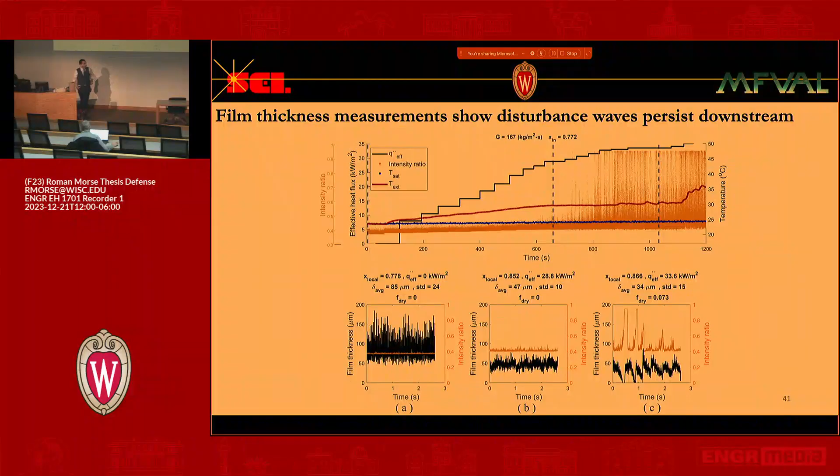So what if I have a non-uniform heat flux? Your experiment is a uniform heat flux. Yeah, so what would happen if I have a non-uniform one? I have no idea. I mean, I feel like it would evaporate the same way, except you'd have a different sort of transport.

So if you have a cosine profile, for example, you'd have a lot of vaporization in the center of the channel, not a lot of vaporization at first. So you'd have not a whole lot of dynamics happening at the inlet, not a whole lot at the outlet, assuming you didn't dry out. You'd reach kind of an equilibrium state on either side, and in the middle you'd have a lot of dynamics.

So you'd have a lot of change in wave frequency, but the base film again remains relatively constant. So the wave frequency would certainly change. The waves would diminish because they're dumping mass into the base film. So the waves start to lose mass, and they also coalesce, because as I lose mass from the waves, I lose speed, so the wave behind me is now a little bit faster than me.

And if I already started as one of the slower waves, since they have a distribution, if I started on the tail end, I'm a little slower wave, and the guy behind me is a little faster wave, he's just going to catch up to me. So you have coalescence, you have basically mass transport from the waves, so there would certainly be a change in the wave frequency along the heated length, absolutely. Same thing here, the wave frequency certainly changes from the inlet to the outlet.

I guess where I was asking is, if you take a non-uniform heat flux, can you take your approach and apply it there and see if you see a difference from the uniform case, if you also measure wave frequency? Okay, so we're back to wave frequency. Yeah, so if you can measure wave frequency accurately, or if you can model it accurately, then there's no reason it shouldn't apply.

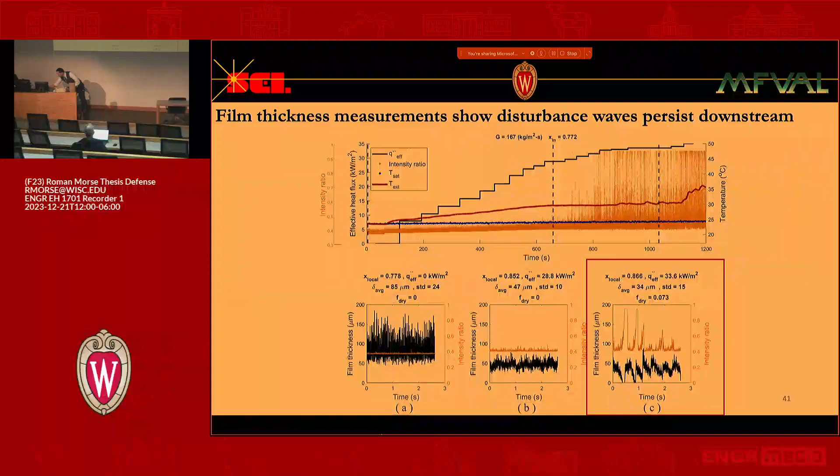Oh, yeah, here we go.

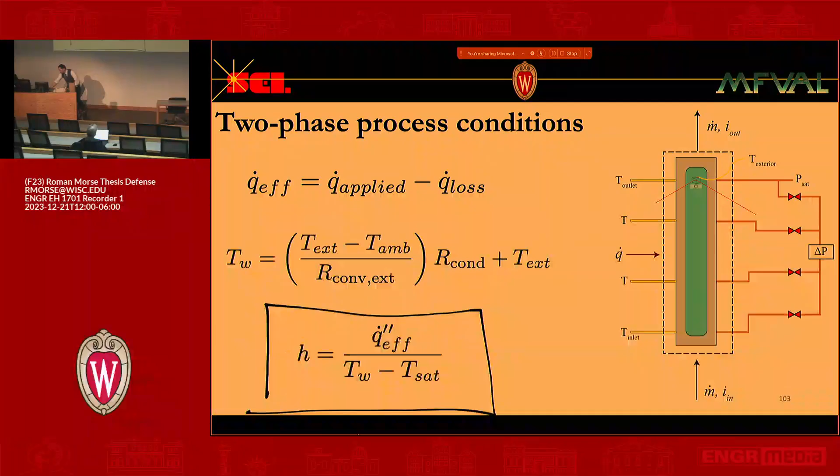So the way we get the heat transfer coefficient is using this thermal resistance network. The biggest uncertainties in the network are this R test section - I had to estimate how much I lose from the outward side of the test section - and the external heat transfer coefficient, which is just natural convection. I estimated that to be 10, then back calculated what RTS is. So they both have about a 10% uncertainty, but that's the biggest part of the uncertainty.

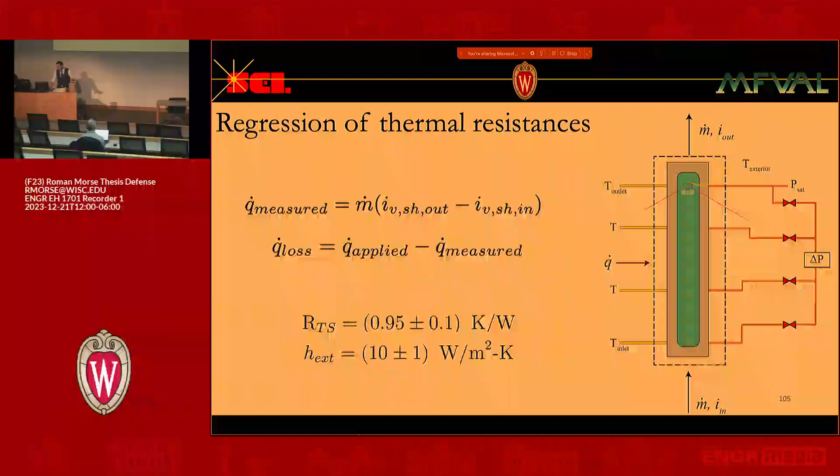With that being said, under two-phase flow conditions, 99% of the heat is dumped into the fluid. I still have a very small heat loss, and this is for the average, including all the dry-out cases. When I'm actually under two-phase flow conditions and not drying out, I'm consistently giving it all to the liquid - almost all of my heat is dumped into the fluid.

I think my issue with this before was your temperature uncertainty - that seems extraordinarily low. What if, for example, more typical thermocouple uncertainty, assuming you don't have a really fancy calibration setup, is more like 0.2? How would that impact your heat transfer coefficient, in order of magnitude? It's different though because it's divided by delta T, right?

If I had a higher uncertainty in my temperature measurement, these were calibrated using a water bath and a mercury thermometer. Tiago did this - we ran it up and down 100 times and took the standard deviation as the uncertainty. But I think it's based on the uncertainty of the actual temperature of that thermocouple, not what the manufacturer gives you, which is the max uncertainty. Well, you can calibrate it to make that lower, which is what we did.

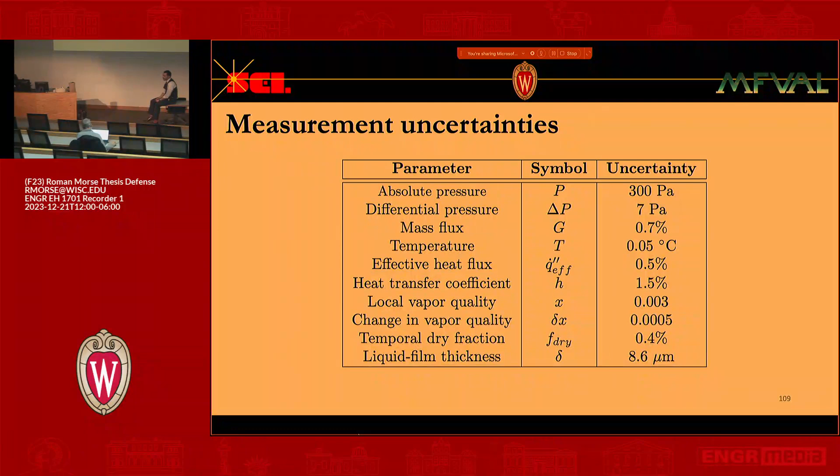Typically when calibrating thermocouples, I've never seen 0.05 - it's usually about 4 times the uncertainty of the thing you're calibrating off of. If you have a mercury thermometer, I don't know what the uncertainty is. It was a mercury thermometer and a water bath, and the uncertainty of the water bath was 0.01, but the thermometer was 0.1. It was a physical mercury thermometer, not digital.

I have some qualms about that low of a temperature uncertainty, because it seems like your heat transfer coefficient uncertainty of 1.5% is great, but I haven't seen people measure that accurate of a heat transfer coefficient when it's really high - it typically is much higher. This has also been corroborated with the inner wall temperature measurement. I compared this when measuring the inner wall temperature using thermal reflectance, and compared my heat transfer coefficient and wall temperature measurement with what I was getting using the thermal resistance network, confirming my heat transfer coefficient estimate.

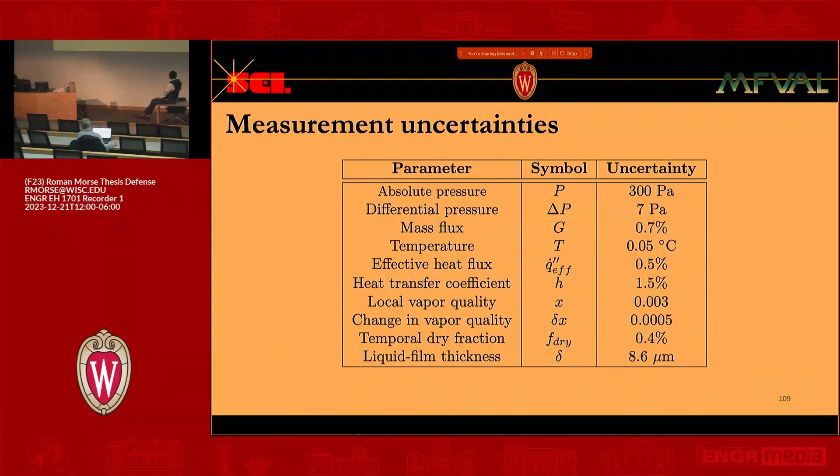Could there be a little bit more uncertainty here? I suppose, but this is averaged over all the values. To the far right of the F-dry plot, there's a huge uncertainty, and to the far left, when you first introduce heat, that delta T is so small that any uncertainty in the temperature becomes significant. So there's a big uncertainty when you just start heating, a big uncertainty when you're drying out, and almost zero uncertainty when all of the heat is getting dumped into the fluid.

One other thing - you talked about this heat transfer coefficient increasing over a very short period of time, but Jason has spent a lot of time thinking about how heat moves through that window, and you're measuring that outer side of it, so it's not really a steady state case, right? It's all a quasi-steady state. What's the time constant of heat flow through the window versus that fractional second of heat transfer? It's about a 5 second lag.

A time average, yeah. But I compared it with the instantaneous to make sure I was getting the right nominal value. I guess it was that one plot where you had a spike for something very simple.

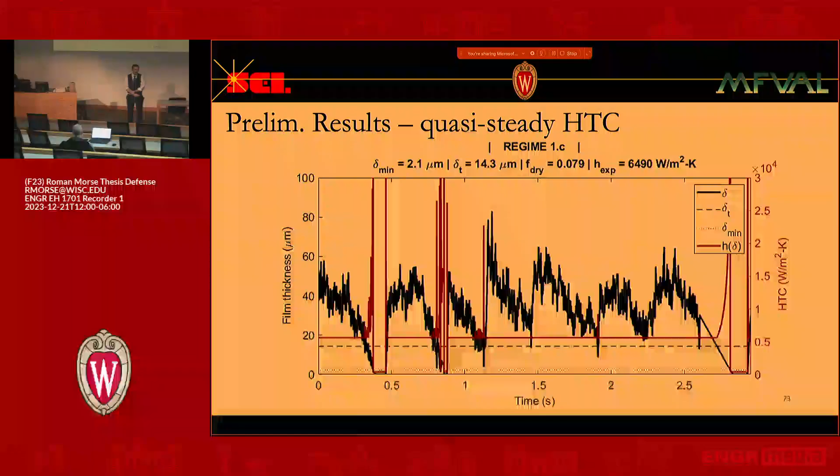Okay, so that's not the same. Yeah, but they're related, absolutely. Because I was wondering, can you maintain a film in a stable way that is so thin that you have that super high heat flux? I don't know how, in a region where it's too thin for it to be stable.

I think, how are you -- I guess in Jason's case, if you have enough flux into that region somehow to equal the vaporization rate to maintain a super thin film, then I would expect a high heat transfer coefficient. But how do you get mass into that region at the same rate at which it's vaporized is tough.

You did look at sensitivity to your threshold at one point and found it didn't really matter because in the end you're integrating over a tiny little time. I'm talking about for Jason's stuff though, right? Yeah, that was kind of related to what Evan was asking -- if you're behind an obstacle, you have a region where it's like a relatively big film. Can you just get to... yeah.